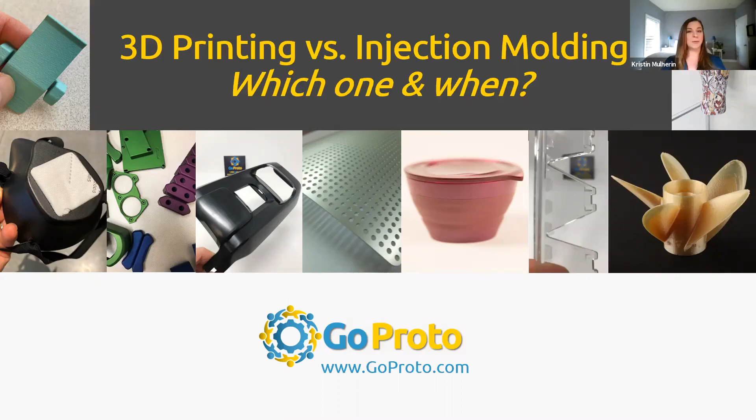This is the inaugural Office Hours event with a focus on 3D printing versus injection molding, which one and when. So to get things started, I'm going to introduce our panelists today.

Today we have Mark Basinger. He's the Director of Western Sales at GoProto. We have Jesse Lee. He's the President at GoProto. And we have Jonathan Wilkie. He's the Director of Eastern Sales. So as a bit of background,

Mark has a background in both 3D printing and manufacturing industries with a proven track record in providing manufacturing solutions for Fortune 500 companies and startups. He helps his customers with understanding the product development cycle and how to implement the appropriate resources at key phases. He's passionate about providing custom manufacturing solutions with a special interest in time compression, cost effectiveness, and quality.

Jesse's the president. He is our 25-year student of the rapid manufacturing space. He's been a part of incredibly diverse product development programs, from early prototyping for products like the iMac in the 90s through high volume additive manufacturing for complex projects like HP's 580 color printers. Listening to client partner needs, utilizing the latest and greatest array of manufacturing technologies, and working with the best people in the product development and manufacturing community is what Jesse finds most exciting.

Jonathan Wilkie started his career as a mechanical design engineer utilizing Pro-E, designing plastic parts, heat sinks, and sheet metal parts. He has experience running 3D printing production equipment, including SLS, SLA, and FDM technologies, as well as designing parts for injection molding as part of a team of tool and die engineers and molding engineers.

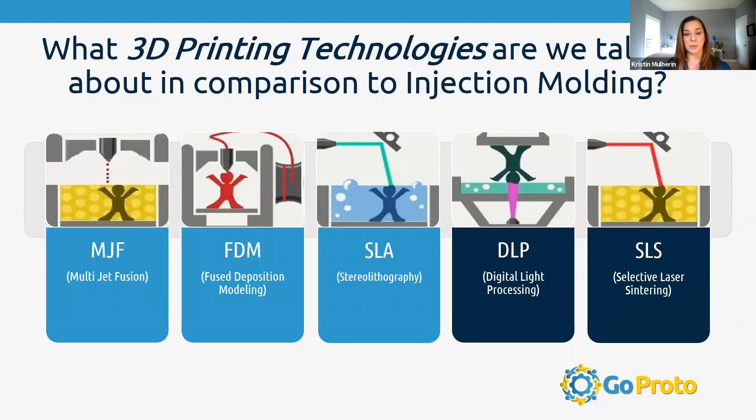Okay, well, moving on then, we'll move on to volume and cost. I think this was definitely a big topic for a lot of people in terms of the break-even points and what kind of volume considerations to keep in mind, how do the costs compare, and how do the material usage and corresponding costs compare, and how are they different? So, Jonathan, do you want to go ahead and start with this one? Sure, yeah, I'll jump in.

So one thing to keep in mind as we go through all of these slides, when you're comparing 3D printing or additive manufacturing to injection molding, is the environment that the parts are going to be used in, how the parts are going to be used, and what are the requirements. So just keep that in mind, because that comes into play with answering a lot of these questions.

So what are the volume considerations? As far as volume goes, what you typically have found in the past, and really now, is 3D printing or additive manufacturing works well for lower volume applications. Let's say you got a project and you got a set of parts at 5,000–10,000 a year, and it's got a short product life cycle and you just can't justify the tooling. That's where 3D printing or additive manufacturing really comes into play.

Then how do costs compare? Costs, that's a loaded question, quite frankly, and a lot of these are really good, but we could spend an hour on each one of these slides we're going to go through today, so we're trying to sort of hit the high points. When it comes to cost, you have to think about, from a standpoint with injection molding, you have a capital expenditure cost for the tooling, whereas with 3D printing, you do not.

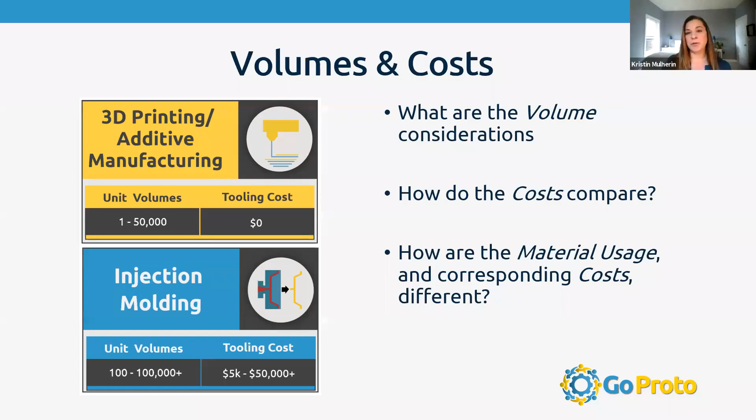Hopefully that answers questions. We also have a chart here that I think maybe, Jesse, did you want to maybe add?

Sure, yeah. Is my speaker working okay? I kind of clicked around on, okay, good. You sound good so far.

Yeah, good. So there were some questions on break-even analysis, and this is an example of one we did on a small part. Something to consider here is that when we talk about cost comparisons, we are considering parts that can be injection molded. Part of the equation here will change around a lot if you enter in things like whether or not a part can be molded. If you take advantage of 3D printing or additive manufacturing and do things like adding lattices or adding combined components, things that are interlocked, things like that that you can't injection mold,

then this equation dramatically changes. But if you have a design that's, let's call it a fairly small part, something palm size or smaller, can be molded, can be 3D printed well, and so all you're considering is cost, you could look at something like what we have charted here, which shows the different lines: we've got MJF, we have MJF smooth, which is something we'll talk about.

So you see that on the left side, you've got no tooling cost for MJF, for multi-jet fusion, whereas you do with injection molding. With injection molding, you don't get parts for a while you make the tool, whereas with 3D printing, MJF, you get parts right away. But then they start to cross over at a fairly lowish quantity in this particular example, somewhere around 415 or a couple thousand, somewhere in that ballpark. Again, not considering time because multi-jet fusion is way faster to start.

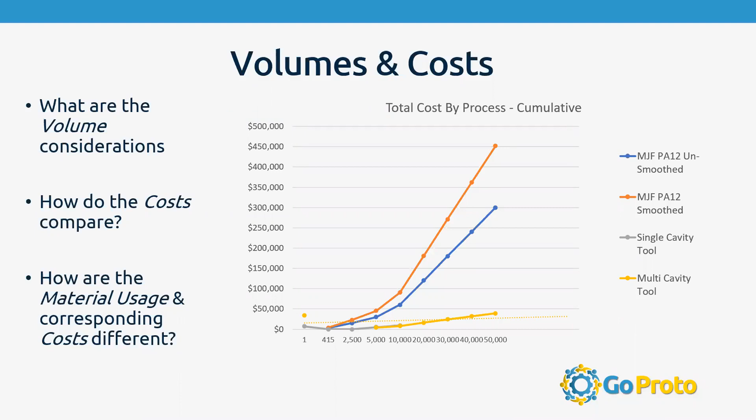So that's kind of been our general focus, although we've always got our eyes on the ability to 3D print tools, because like Jonathan said, you do come up with things like conformal cooling and things like that that are very interesting for injection molding.

Kristin, can you try, if my audio is working okay, your audio's working fine. Oh, great. Can you turn my video back on when you get a chance?

Yeah. Okay, great. So we're going to move forward because we have quite a few topics still to get through, and we're already starting to get behind because there's a lot to talk about. We do have a question here for medical grade materials. We will get to that in the materials section, which is coming up. So hold that thought, and if we don't, I'm sure Jesse or Jonathan can address it.

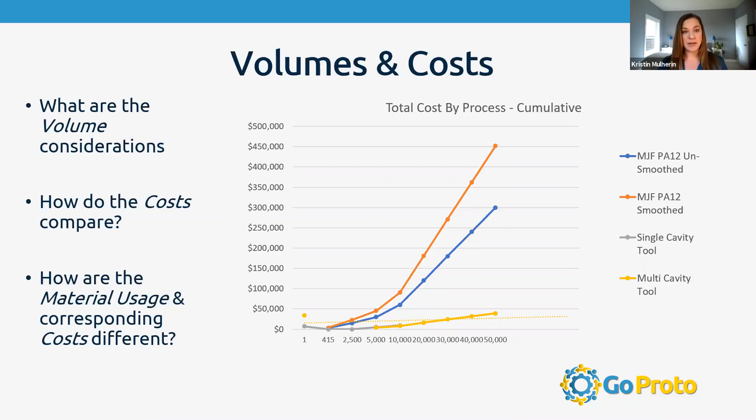In the meantime, we're going to move on to injection tooling, the various types of injection tooling, and how they compare to 3D printing. Yeah, so this is really the three areas that you see for tooling, really with our company or tooling in general: rapid injection tooling, bridge tooling, production tooling. And we play in all three of these sandboxes, if you will. The rapid injection tooling is going to be more of a soft steel or an aluminum tool where you're going to run 500 parts and be done with a tool, strictly a prototype, or you're going to do very low volume applications, say 5,000 to 10,000 max off that tool.

The second one is a bridge tooling scenario where your lead time can be a little bit longer, typically in around the 4 to 5 week range to get the tools completed and T1s off of it. This is, in my opinion, where we really shine as GoProto, because our bridge tooling is fast and can be used as prototype tools. It can also be used for low volume production tooling, where you have a product life cycle that is very short and you just can't justify a, say, 16 cavity tool that's going to take you 2 months to produce T1s off of it. So bridge tooling works really well for low volume production, possibly even some prototypes, and then bridging that gap between prototype world and high volume production.

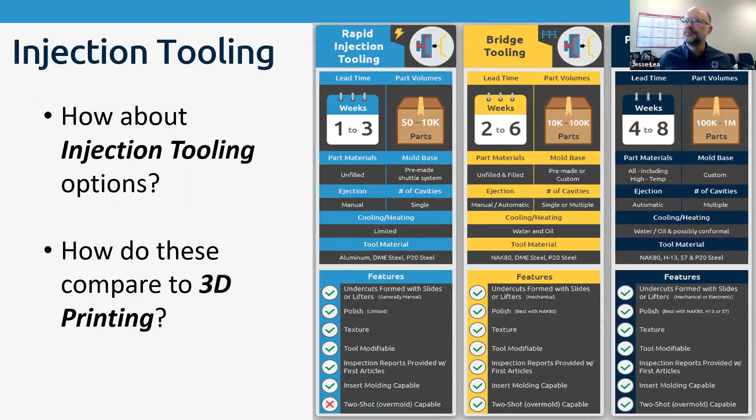Okay, so moving on to the next topic, we have materials. We have the questions here that were submitted ahead of time, but we also had a couple people interested in finding out if we can print medical grade materials. So if you want to address that as well. Jonathan, do you want to start? Yeah, sure. I'll address the medical grade first. There are some medical grade materials out there. One of the things about medical is a lot of people want to be able to sterilize them. So with the PA12 material that runs in the MJF technology, you can sterilize them through an autoclave process. And it does have some FDA clearances for skin contact type devices. Is it an implantable? No, not necessarily.

Then there are other medical grade materials out there as well. There are some for the SLA technology. There are some for the DLP technology. There's none for the PolyJet technology that I'm aware of. There are medical grade materials for the FDM technology as well, but it's few and far between. One of the things to keep in mind, and I mentioned this earlier, with 3D printing or additive manufacturing, is the process dictates the material you can run. So if you're going to run nylon 12, you're going to have to run it in a powder bed technology, or you're going to have to run it in the extrusion-based FDM technology.

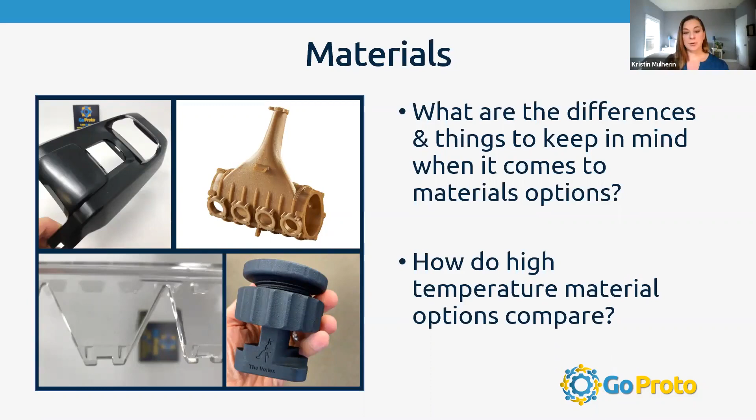Yep. Perfect. All right, so we'll move on to the next topic, which is quality. How does feature resolution compare? How about the tolerances, and which one makes sense when the costs break even? Sounds good. Real quickly, we've got about 20 minutes left in the presentation. We've got those three and some Q&A, so we'll try to move quickly, though these are very important topics.

So feature resolution, you can get good quality features out of the 3D printing technology, but once again, each process has its limitations on feature resolution. The SLA is the best. It's the granddaddy of all the additive technologies. It was developed back in the mid-80s. It cures the material with a laser, and you can get very fine details on that.

You can get down to feature resolutions and tolerances of 1 thou. So it's the best when it comes to feature resolution, but you're going to sacrifice mechanical quality. FDM, I would say, which is the extrusion-based technology, is on the other side of the spectrum, where it has the worst feature resolution because it is an extrusion-based technology, and you really are not going to want to go much less than, say, 10, 15 thousandths on features. You'd probably even be better off going at 20, just so you know they come out in good quality. So it's on the other end of the spectrum.

And then sort of in the middle, I would say, and Jesse, you jump in here if you think different, I would say the multi-jet fusion is sort of in the middle because you can get 5 to 7 thousandths as far as feature resolution, and tolerances on the MJF technology, which is getting closer to your standard, you know, sort of rule of thumb injection molding tolerances, but not quite as good as SLA.

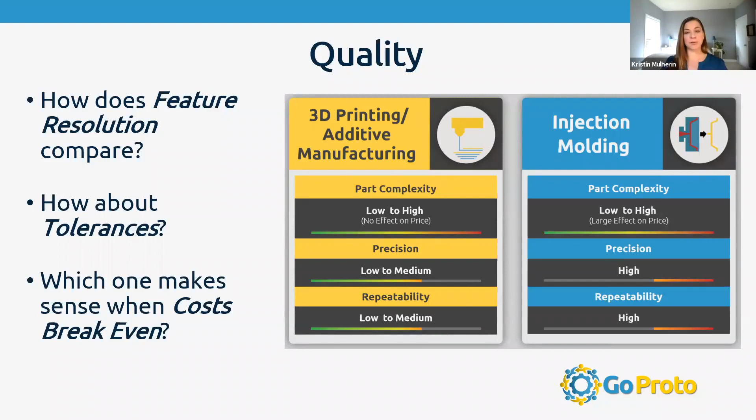Great. So I think on that note, we'll move on to the next topic, part properties and design. Sounds great. Excellent. Again, this is Jesse. I'll address this one. Part properties and design has a massive impact on most of the other slides that we've talked about, on which process the part is a good fit for, what your part costs are, what your tolerances are, what you can expect for surface finish. And the answer, well, how do I design my part to be the best for all, is going to vary on the technologies that you use.

3D printing is exciting because you can use different design criteria to design your part, and you can do things that you don't have to worry about with, or that cause problems with injection molding. We've all had problems with things like draft, which is the angle that you need to allow a part to be ejected off a mold without sticking. You don't have to worry about that with 3D printing.

In injection molding, you need to have what are called consistent wall thicknesses, meaning that you can't have a rib that goes into a wall and have it be too thick and create a sink, because you've got a big kind of ball of wall thickness where the rib meets the nominal wall. You don't really have to worry about that as much with 3D printing. But with 3D printing, if you design a part well, you need to consider things like nesting. Nesting in a powder bed technology is like Tetris, where you're trying to fit all your parts together in a way that they are the most space efficient.

In your part design, if you have, let's say, a boss that's sticking up, and that prevents other parts from nesting around it, then you're going to have fewer parts that you can print per build. You're going to have a higher part cost. You may also have tolerance issues or some other problem like that. Whereas if you, say, make that as a separate piece, or you combine it, or just change where that feature is, you may be able to then nest your parts together better.

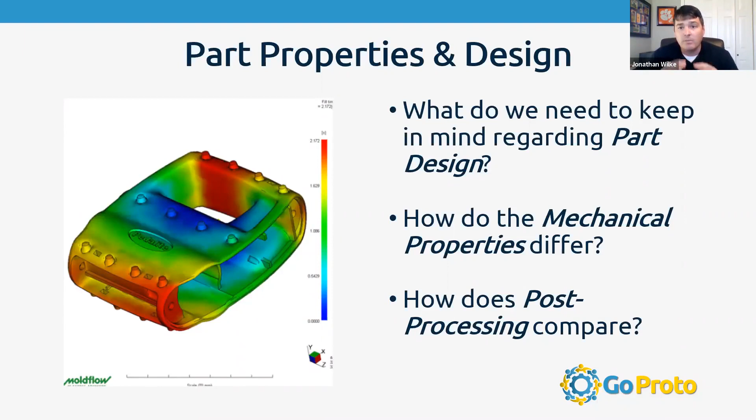I want to jump in there real quick to add to that, and I'll make it quick, Kristin. From a nesting standpoint, the MJF technology, or any powder bed technology for that matter, the raw material supports the layers as they're being built. So you don't have to have a secondary support structure, so we can just take parts and cram them as best we can to get good quality out of your build box dimensions.

Whereas with FDM and SLA and PolyJet, they have to have a secondary support structure, because the first 200 thousandths is nothing but support adhering to the build plate, and then you start building on top of that. So you can't build on top of other parts, because then you have to have a support structure to continue to build it.

So, well, I'll show this part again. If we had this in SLA, you would have supports all on the bottom side here, and when you remove them, you would end up destroying the texture. So you'd have one good side and one bad side. Well, with 3D printing in powder bed technology, you can have texture on both sides because the powder can be removed and you don't end up damaging one of the surfaces.

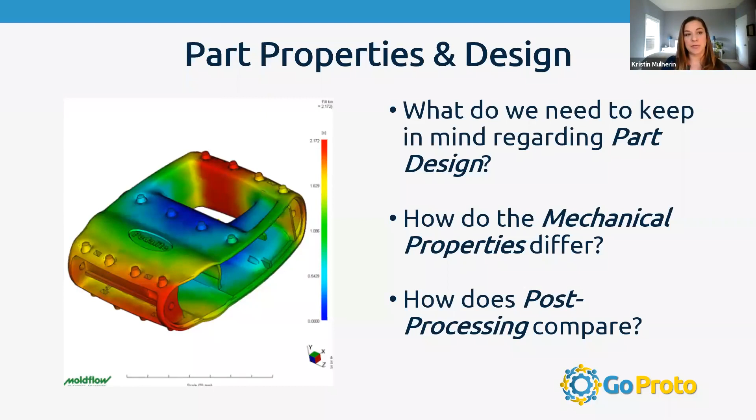Huge. We do have one more quick question I think we can squeeze in here that popped up related to design and post-processing. Sure. Do you add metal threaded inserts to MJF or other technologies as a post-process? Yes. Yeah, great point. So this is a thermoplastic. Thermoplastics, once the part is formed, went from solid to liquid by heat and then back to solid. And so they can be turned back to liquid again.

So when you're inserting a brass insert, you're heating up the material either by hand or by a machine, and then inserting it as the part is melted, and then the material solidifies back around the insert. With the photopolymer processes like SLA or DLP, it just kind of gets soft and sort of moves out of the way, and you sort of stick the insert in, but then you have to glue it because it doesn't get back around the knurling.

With powder bed technologies, it does. It melts and gets back around the insert. So you can expect the inserts to perform a lot like they will with your injection molded part, if not exactly the same. And we've done some very specific testing on that, and it's come out excellently. So again, that makes it very, very capable of doing what you would expect out of a production part. Yep.